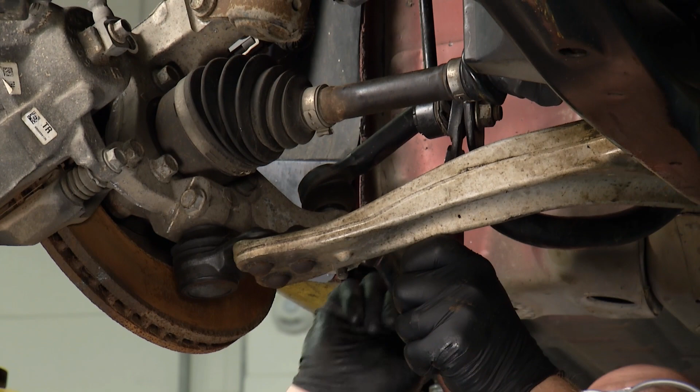Well, if you missed last week, we pulled in an HHR, and Brian, it was pulling a little bit to the right. You think it was dragging a wheel down the street. It was just a little bit more than I thought it was going to be. And that it was. You know, we had to go into the whole suspension system. We tore it all out. I mean, we had a broken spindle we'll look at here on the table in a minute. But, you know, we went into the actual rack and pinion system. That was huge. Walk us through that process.

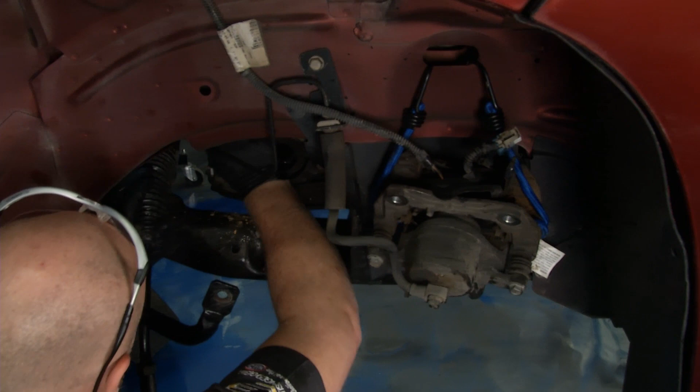Yeah, you know, it really wasn't too bad. There were two big mounting bolts we had to get to. It was easy access with the wheels off. We actually lowered that subframe down just a little bit to give ourselves room. It wasn't bad to get that out or the new one in. Everything is torqued to spec. More inspections as we were in there, making sure there was no welds cracked, no more damage done. Feel really good about the repair.

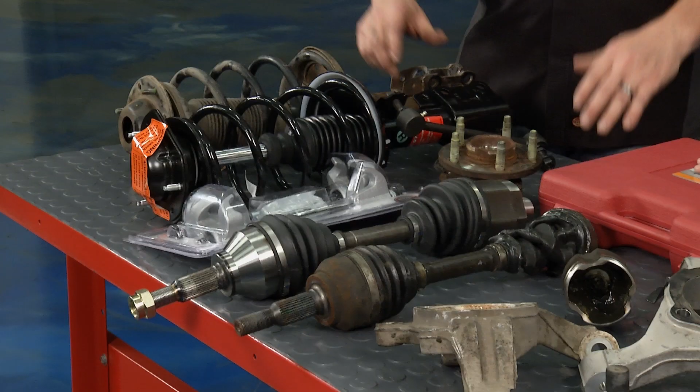We also made some strategic decisions, like we don't want to transfer the old coil spring over and have to go through that, even though we got the right tool for the job. Make it easy. Save yourself some time and risk by getting the whole assembly, which we did. We got the new sway bar links. You can see that's the exact same length. We're all set there. And of course, we got the axle.

Yeah, and time's money. So, you know, by the time you're doing this, you're wasting a lot of time. Time's money. You know, we're actually going through this and talking about the cost analysis. I mean, we're going to do that at the end of the show, but I think we're going to save it. I think we're going to be all right. Absolutely. Well, let me grab the axle and the strut. I'm going to get started.

Before you do that real quick, it's really good to look at both of them. You can actually see the axle right here. Oh, yeah. This is the one that blew apart in the accident when it got hit. Bam, that's it. It pulled right out of the plunge joint right there. Tripod. It's gone. So grab that, get started, and we'll go over a couple of these other components. See you in a few.

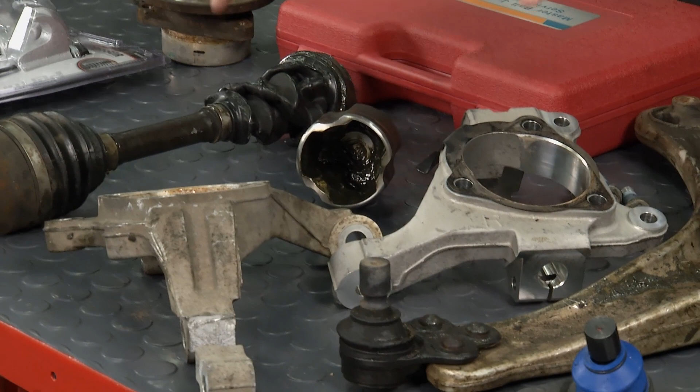All right. Now, when you look at these other components right here, we're going through the spindle assembly. You actually saw the spindle up on the car, and this is pretty good because you can see right here where it's broken and separated right there. That's why we took it off with the whole strut assembly when he did. Now, the new one's located right here. I went ahead and I pulled out the hub, the whole hub. It was in good shape, so there was no need to replace it. There's no problem there. We're going to put that on in a minute.

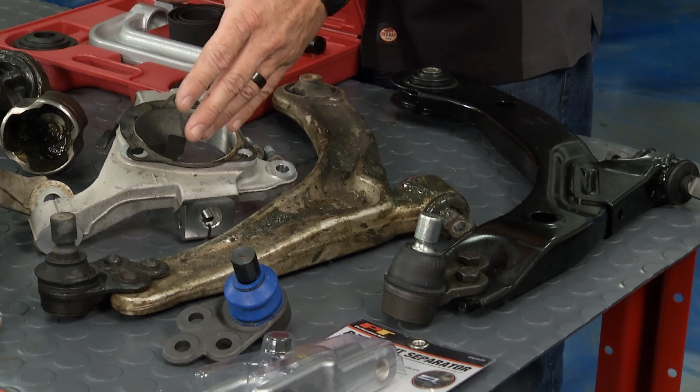But then we go over here to the control arms, and this is interesting because Rock Auto actually sells a control arm master kit right here, which can do actually the bushings on there along with the ball joints themselves, because a lot of control arms, you're going to have to press the ball joint in and out of there. Well, like Brian said earlier, we're taking an opportunity to go ahead and just save a little bit of money here and time. We got the whole unit right there. So the whole unit right there, we're going to put it in. We don't have to mess with the ball joint. Everything's right there in place.

Now, the hub, just as easy as taking it over to the spindle and take it in here, slide it in here, put it in, line it up, bolt it down, torque it to specifications, and then what I'll do is I'll get these parts over, give Brian a hand. He's going to need a hand getting all this front end back together. There's a ton of work going on over there.

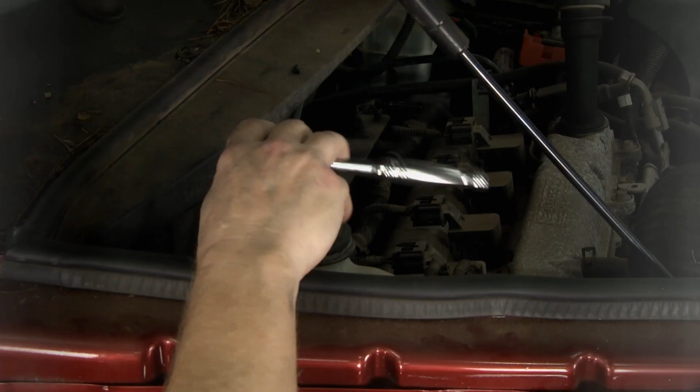You're right, we're getting it done over here, John. All right, that's the third nut on the top of the strut mounting bolt. We don't have them torqued down yet. It's just so that it'll hold that in place and give us some flexibility to work with everything. We got the new CV axle supported.

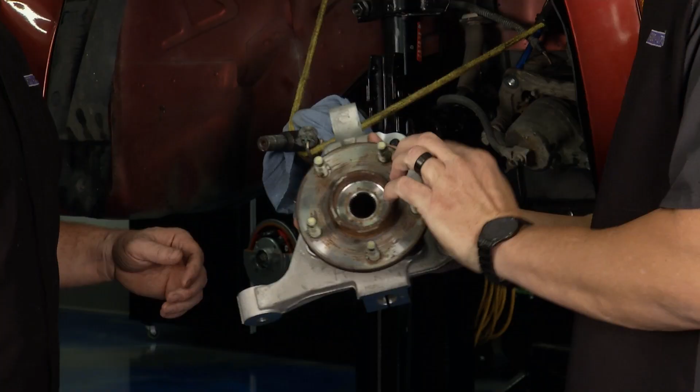Hey, John, how about rolling that spindle over here? Man, I got it ready for you. Perfect. Looks like you're working hard. I actually got the whole spindle assembly, Brian. I got the hub pushed in there real nice, bolted in from the backside. Got your ABS sensor, everything's tucked away.

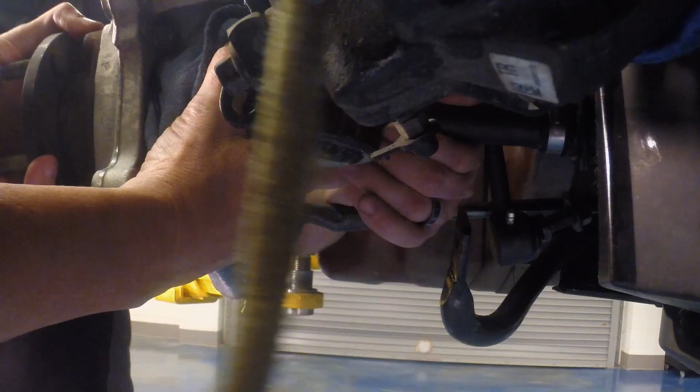I'll tell you what, if you give me a hand, I'll support this CV axle. You want to undo it? Yep. I'll get this bungee out of your way. I'll run it in like this here. Keep the pressure on it, and we'll just put it right up in like that. Great. You want to take it? I'll drop it down a little bit. If you want to take that strut, work it up in there. There we go.

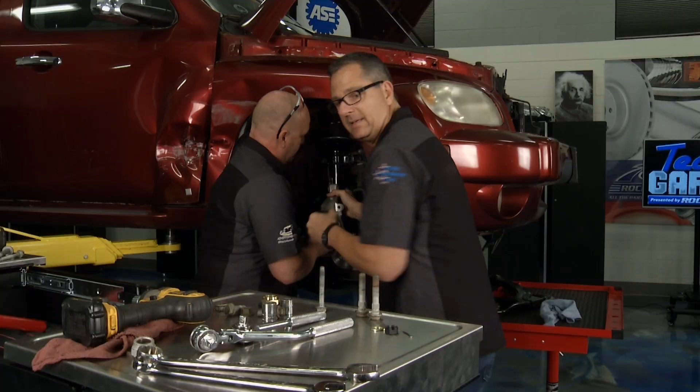Got the strut bolts laying right there for you. Keep the pressure on it, please. Yep, I got it. Strut bolts are right here. If we just get one in. Get one in there and hang it. Yep, that's the way to do it. Golden. And we're not messing with the alignment because we're going to get it close. That's perfect. Okay. Nice. Now let's get that control arm in.

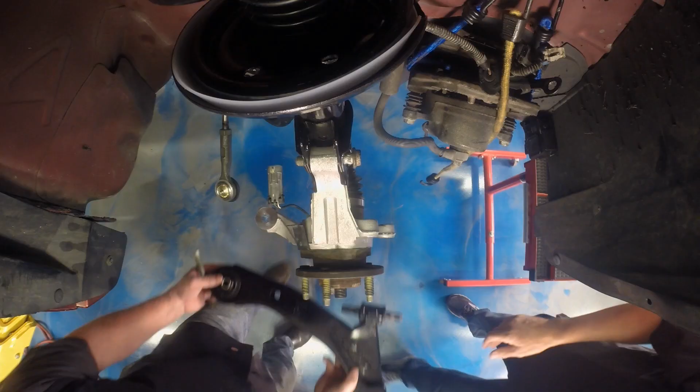There you go. Okay, I've got the big pin here. This was actually not as hard as I thought it was going to be coming out. We're going to go in and up and over. All in one. Well, I'll let you do it up in there. There we go. Come on. Get it up in there. We're working. I know it's not easy. It was tough coming out of there too. Just be patient. You've got the whole frame to go in there. The bushing's got to get sandwiched in there. All kinds of things going on there when you're moving it in.

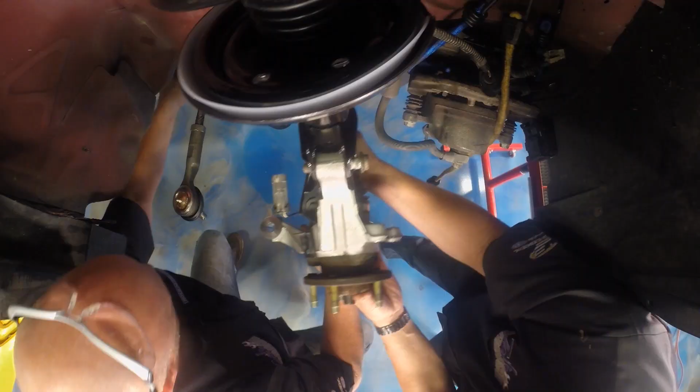There we go. It is beautiful. That's good. All right. I'll hold this side up if you want to hold that side. Okay. Come up a little bit more. Let me get a pin in here. Go ahead, and I'll line up my side. Which way you got to go? Got to come over. And forward. I don't think you're in all the way. Yeah, you got to go. Come on back. Trying. Oh boy. There you go. Perfect. Let me hold this side. Hold that. There you go. Look at that.

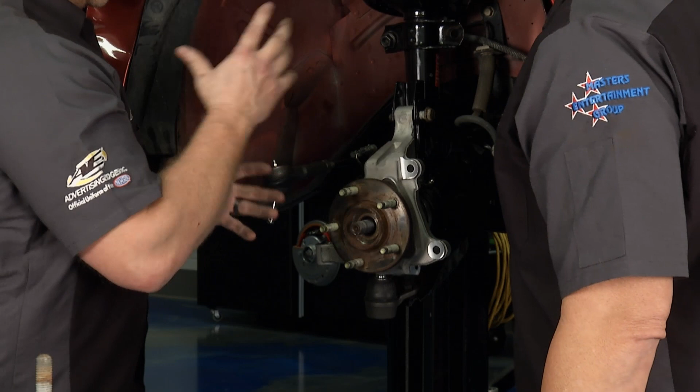Should be supported. Yeah, we'll get the ball joint in. We'll get all this reassembled, get it torqued down. That's really important. We're going to be close, but we're definitely going to need an alignment. We still have to get the steering rack connected, the sway bar link in, and we're going to be good. I'm huffing and puffing. This suspension work can get difficult. Be patient. Get your buddy, manhandle it, get it in there. It's ready to go, man. This HHR is going to drive.

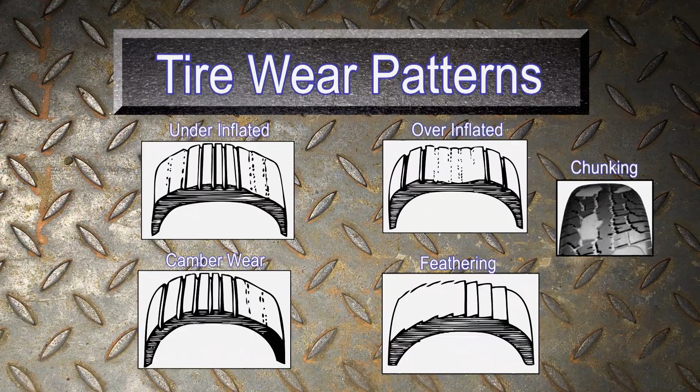Now, you guys have reached out on Facebook and email with questions, and most of them were about tire wear patterns and a lot of alignment angles. So what a perfect time to do it. We got our HHR over there, and Brian and I have been talking about that geometry and getting it right. So let's talk tire wear patterns. Top left-hand corner right here, well, that's pretty simple. It's just an underinflated tire.

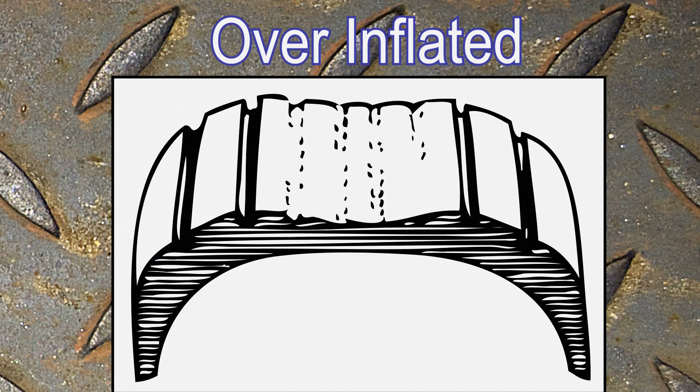It's going to wear on both sides because it's going to bulge down on the road. Now we move over to the right there, dead center of the tire, all the way around. That's overinflation, too much air. Now you have tire pressure monitors, but you still want to go out there and check it so you keep the life of your tire going. Over here on the bottom left-hand corner, this is actually called camber wear. I'll explain camber in a minute, but just keep these in your mind as we switch over and start looking at the angles, because you're going to understand why the tires wear like that.

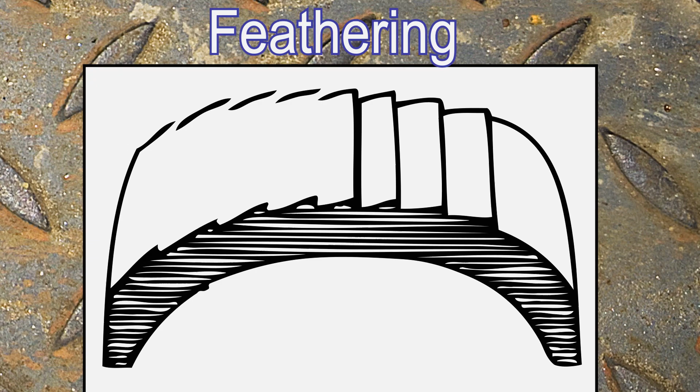This last one right here on the bottom is called feathering. That's a toe in and toe out problem where it feathers the tire clean across, and we'll see that in a minute as well. Now the last one on the far right there, that's called chunking. What happens is you have bad shocks, the tire's coming off the road, bam, bam, bam, you're getting chunking. So it's time to do an alignment.

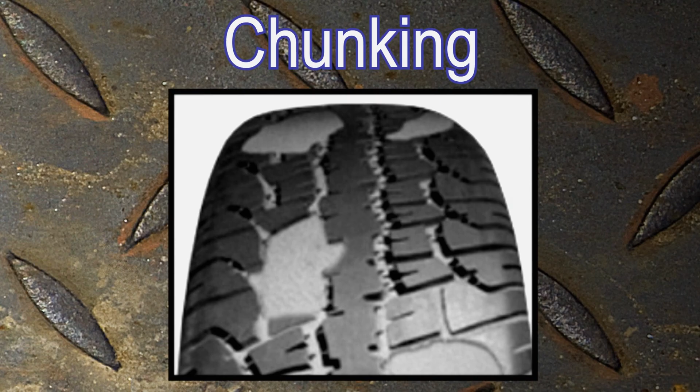We can go to the next screen. Before you get an alignment, the first thing you want to do is get a pre-alignment inspection, because I'll tell you, 9 out of 10 cars are going to fail this pre-alignment inspection. We're talking about everything on the car: tire pressure, your bushings, your steering linkage, your power steering, your wheels, and then some pre-alignment numbers. It has to be in good shape. Everything has to be tight or the alignment's not going to hold.

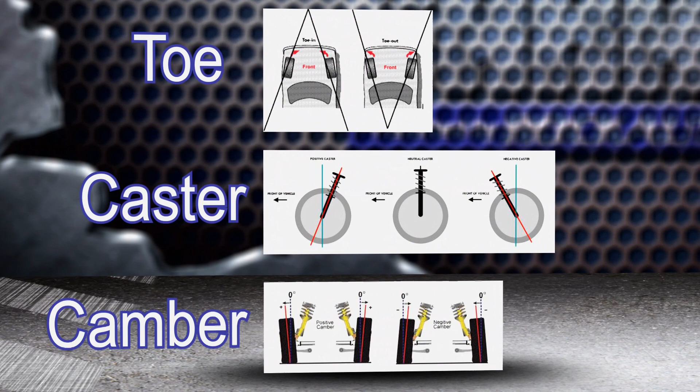And then we'll talk about these angles right here. The first one being toe, caster, and camber. We'll pull those out in a second.

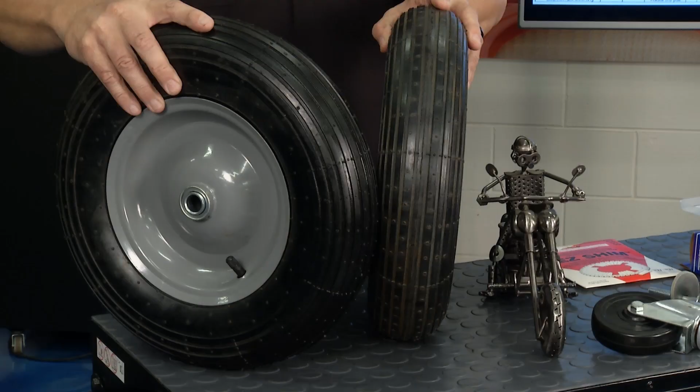Let's talk about that first one up there. That first one up there is toe in and toe out. That's really simple. I can take my wheels right here and I could toe them in. That would be the front wheels going in that angle. If I toed them out, that would be this way.

Now think about that feathering pattern I talked about earlier. It's going to feather from the inside out when they're toed out like that. If they're toed in, they're going to feather from the outside of the tire in. That's the most tire wearing angle, and that one will wreck a tire in no time.

Now the second one we want to look at is caster, and you can see the graphic there. It's the forward and backward tilting of the steering knuckle. So if I had my knuckle go back this way, it would be negative, or forward. A good illustration of that is our chopper here. Now my chopper's going way up there, that's positive caster. You know, when you're riding on your bike and you take your hands off, that's because your wheel's way out there. It gives you good steering and good returnability.

Negative caster, on the other hand, most cars don't have it, but a good illustration of that is the buggy in the store. When it goes around and starts wiggling all over, you'll get some wander. Now that's not a tire wearing angle, but, and this is important, we always pull to the least caster. And that's important because we can actually cheat caster a little bit and go up road crown because it's not a tire wearing angle.

Last one to look at right there is camber. Pull that illustration out and you can actually see the camber goes in, which is negative, and out, which is positive. Now you remember that angle I talked about, that tire wear? Right here. If we go out, that's positive, and I'm over-exaggerating here, but if you look, this will wear around the outside of the tire. On the other hand, if we go in like that, it's going to wear around the inside of the tire.

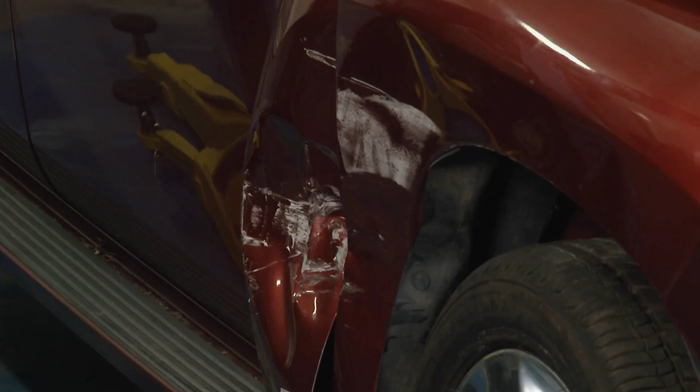Well, with all that suspension work finally done, tell you what, we're getting closer. Don't forget, we still have to go get a full-blown professional alignment. We'll talk more about that in just a minute. You can see that the inner fender has a lot of damage. The actual fender is damaged, not to mention the door.

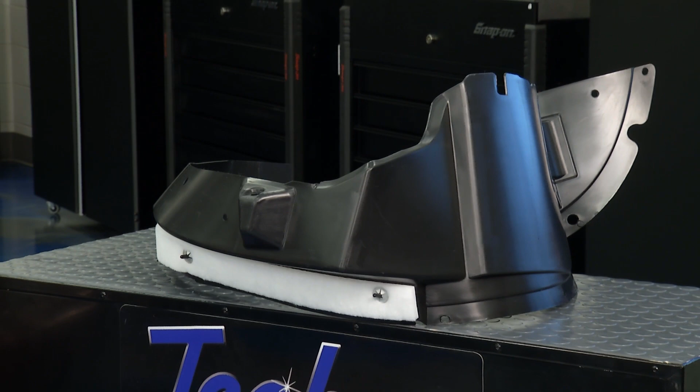Well, now, as promised, we told you we would do a driveway, pretty rough alignment here, but you want to get this thing close, so we're just going to adjust toe.

You don't want to drag those tires down the street to get to the full-blown alignment shop to get that done. Camber, we're pretty close. Don't worry about that. Hey, John, can you give me a hand helping set toe here? Yep. Take a measurement from back first. That's the key. We're going to take a measurement from the back of the tire and the front of the tire.

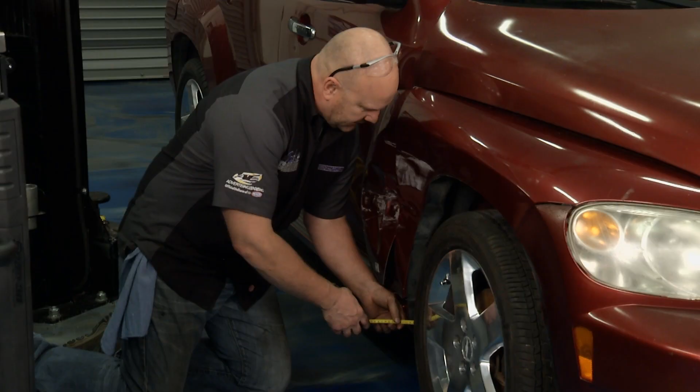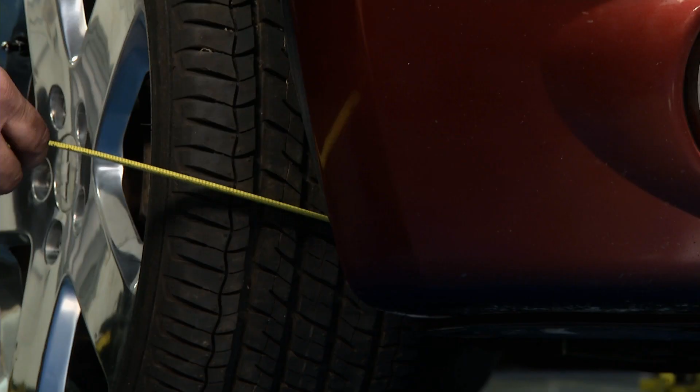We're at 66 1/4 here. 66. I'll send it back to you. Throw it to the front. Let's see what we have. So what we're doing, remember that adjusting nut? There you go. Got it. Same spot in the front. Great. Yep. 68 1/4 here. Wow. So that's a 2-inch delta.

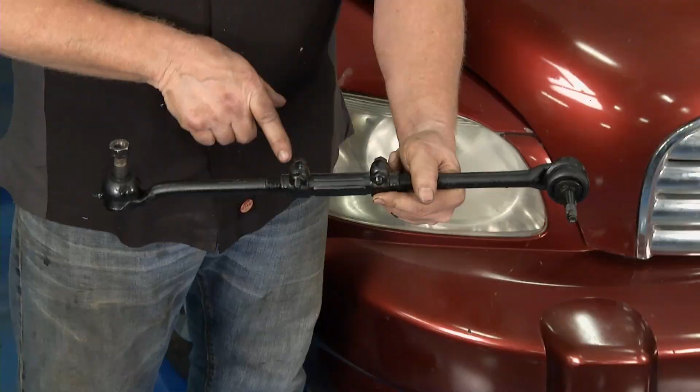So you think about that adjustment nut we had on the tie rod end. If you had that set up, you'd want to back that off. Go to each tie rod end, back them out about 1 inch. That's going to get you in the ballpark. Come back, check the measurement. You should get an average that's darn close. Yeah, no doubt about it. If you had a parallelogram steering system like this, you would take the adjustment sleeve, loosen this, back your tie rod end out 1 inch from there, and you'd be in the ballpark. Yep, and ours just had a locking nut, same difference.

That's pretty awesome. You know, our HHR is awesome. It's actually ready to drive, man. I'm excited. Yeah. I think I may give you this one the keys.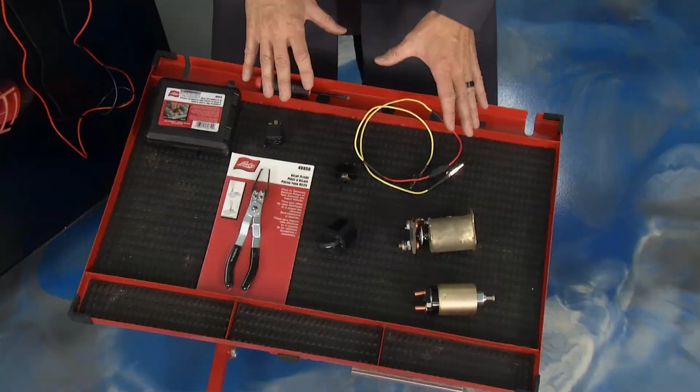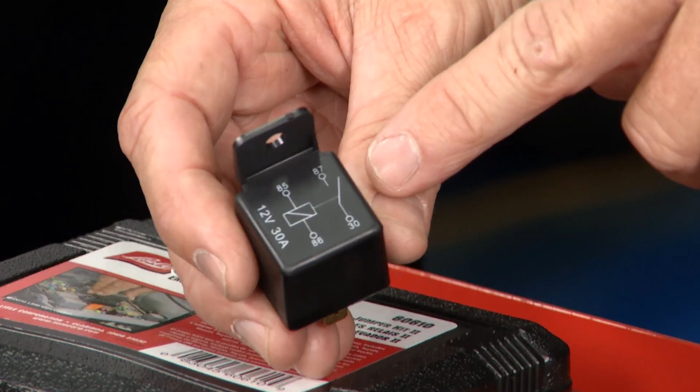Now we're making great progress on our Tech Garage segments, and this one's all about controls, switches, relays, stuff that makes your car work. And I want to take a look at the table here. I want to talk about some switches. Well, it could be as simple as a solenoid switch, like a starter. You can see right here, it just engages. When it engages, it makes a contact and it allows the voltage to go to your starter. You could have a four-wheel drive switch, a toggle switch, but what I want to focus on is relays because they're super important. And I have a relay right here. And the important part of this relay is actually the terminals. You can see the terminals right here, 87, 30, 85, and 86.

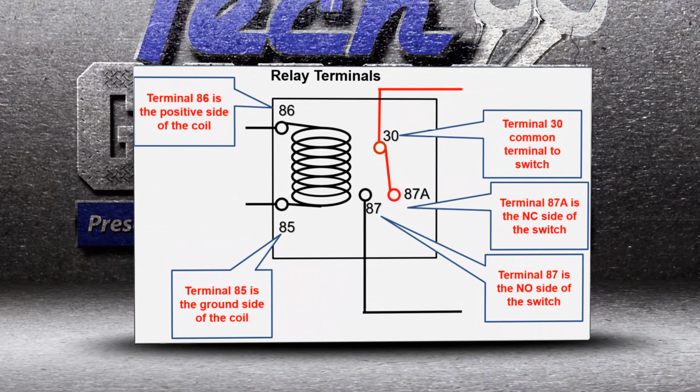Take a look at this graphic because this is important. When we're talking about a relay, we have a control side and we have the actual load side. 86 and 85 is the control side. That's going to be the low amps. 30 over to 87 to 87A, that's my high voltage and my high amp sides. That's what's going to run the component.

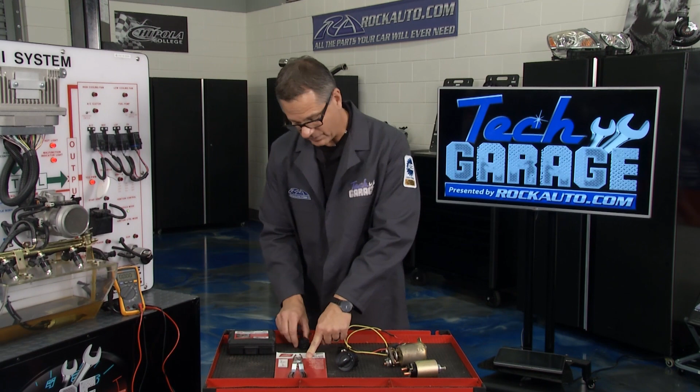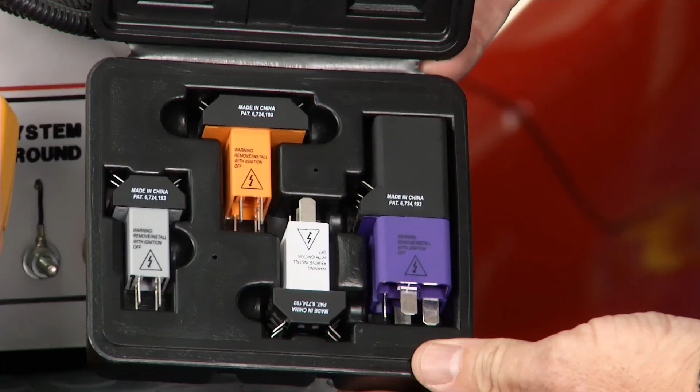So if we're dealing with a relay like this one, we're going to go ahead and use our kit here. I have two things from rockauto.com. First of all, I have a kit right here which actually pulls the relay. If you have a fuse box, that's cool. And then I have the coolest thing ever. This is a relay jump kit, and I can open it and show you what's inside. Inside of here you have all the different relay adapters. Now that's nice because I don't have to go poking or damaging any wires. I can just put this in series.

Now our board right here, we have a couple of relays up here. AC, high pressure, low pressure, and then we have a fuel pump relay. We're going to deal with the fuel pump relay. If I pull that out, I'm going to put our adapter here right in series with it, which is super cool because now I have the ability to make all my measurements and jumps if I want to jump it and see if it's actually working or the circuit's working. Got a voltmeter right here. I'm going to go to ground.

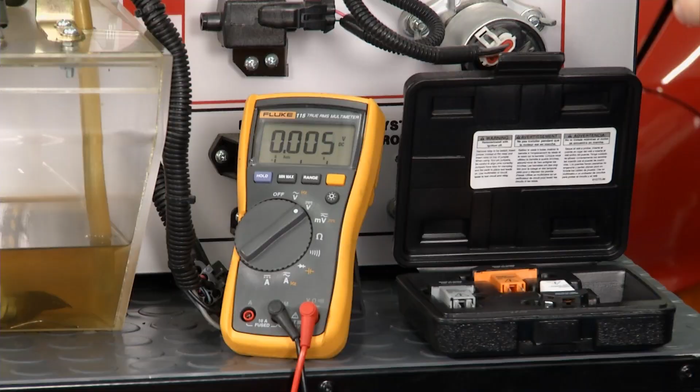When I go to ground down here, I'm going to come up. I'm going to touch terminal. That's supposed to have power right there, which is 13.97. That's good voltage. And then I want to jump that over to that, we said earlier, 30. Now be careful. You may have that at two places. One's low amps, the other one's high amps.

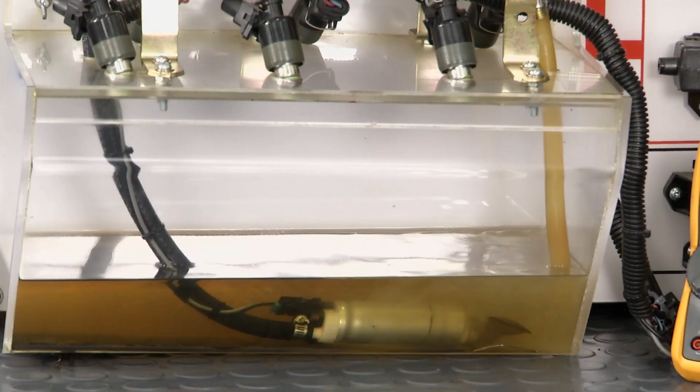So if I just take my fuse jumper wire, very important, and I jump 30 and 87, you can hear the fuel pump run. So what does that tell me or tell you out in the driveway? Well, it tells me your fuel pump's working, tells me your wire harness is working, but it doesn't tell you that the relay's bad. You still want to make sure you have the control side. Maybe the computer's grounding it or a switch is grounding it on the other side of the relay to magnetically pull it in. So it's pretty complex.

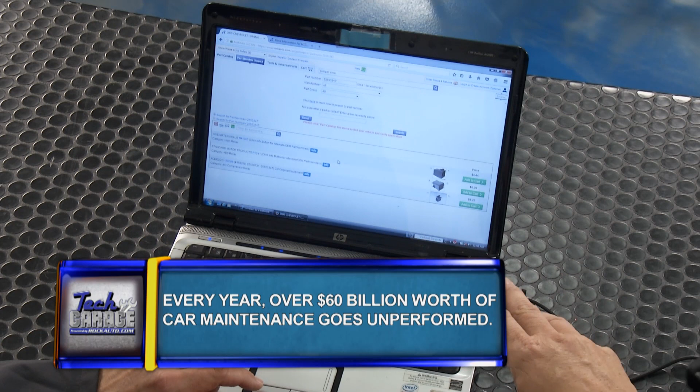Now we saw some interesting tools over there, man. I love it. As an instructor, I'm talking about diagnostic tools. I wouldn't expect that at all. I found them on your website. Why don't you show our viewers where that stuff's at? We have the tools and universal parts tab, and it's arranged like it is for specific cars under electrical and body, and there's a tool section. The tools you were using are under electrical, switch, and relay. We have the relay test jumper, the pliers. There's lots of fun tools you don't even know they exist until you get in there and look around. And you say, wow, I've been struggling with needle nose pliers and my elbow trying to get that to work for all these years. And there's a tool that makes it easy.

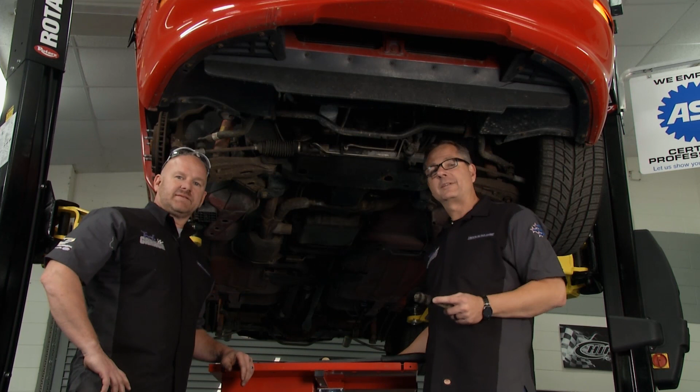Well, Jake, we love it that you learned something on the show. Heck, we love it that you're watching the show.

That's pretty cool. But Jake, don't overlook the obvious. We always go back to the basics here. I mean, suspension, we'll show you some inspections, but don't forget about the sway bar links. I mean, look at this. This one's worn out right here. You can see it pull down. I pulled this one off, not too many miles. Very, very common. Rattle, kind of hard to find, but breaking all the time, Brian.

So is our Firebird. That'll create a rattle all day long. You know what? I checked on the Firebird here. As soon as I put pressure on, this sway bar link fell right out in my hands. It was broken and just rattling around in there. It wasn't making a lot of noise, but there it is. Yep, snapped right off. Right off.

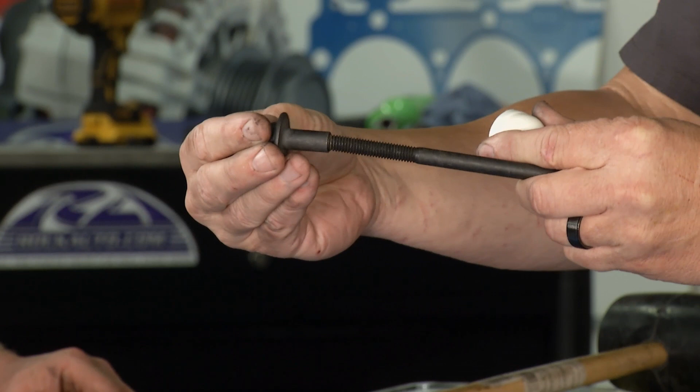Nothing to it. Thankfully, Moog has a problem solver for that. I love this. We got a new kit we can put on both sides. And the cool part about that is you actually have the extra piece right here, so if it's not loaded up or not broken like this, you can go ahead and extend it and everything's going to come through and you can pull it all back together. Makes it so much easier.

Yeah, let's get this all together. It's going to be a piece of cake. All right. Put this back in for you. I'll get this going. Yep. All right. So we put that in there.

Jake, I mean, the suspension, that's awesome, but rattles, a lot of times you can use a rubber mallet. Rubber mallet's great because it makes everything vibrate. So you're just hitting everything, listening, following the vibrations here. Exhaust systems, very common rattles. The exhaust pipes, the dust shields, the heat shields on all of that stuff. You know, sway bar links, suspension, any components. Rubber mallet does a great job.

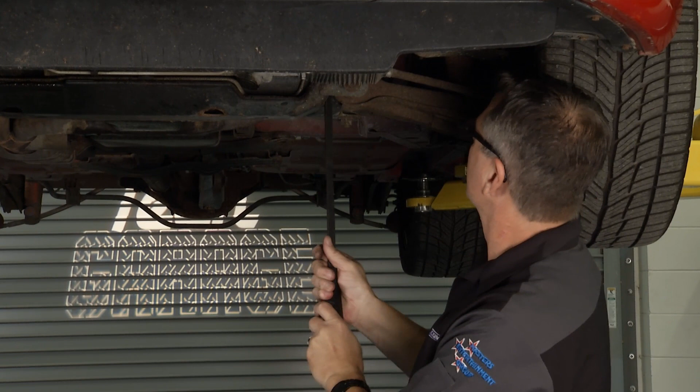Suspension checks, once again, don't be afraid to use a pry bar, man. Grab a pry bar. You got the bushings on the rack and pinion right there, the bushings on this control arm back and forth, ball joints, whatever it may be, even the sway bar links. You can wiggle and pull on that. Man, don't be afraid to tug on the suspension. Absolutely. That was easy. We'll do the other side. We'll get both of those torqued down. I feel really good about that repair.

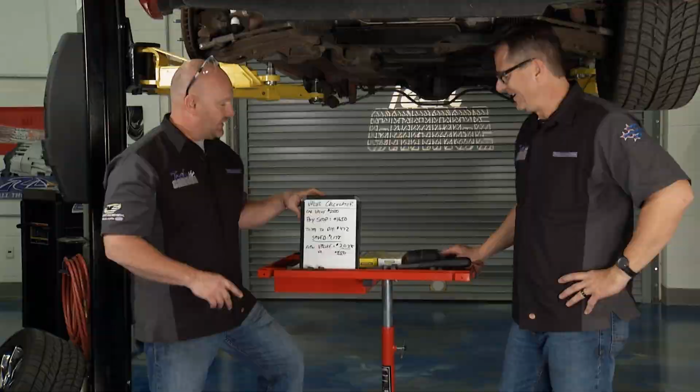Thinking of suspension, tell you what, we learned a lot on that HHR project. We did, you know, Brian, and throughout the whole show, I'm kind of wondering if the car was worth it. You're an expert when it comes to cost mitigation. What'd you find for us? Well, when he said it came in with a slight pull to the right, I started the calculator and was keeping track through the whole thing. This is a little better than my drawing. There you go, yeah, a little bit.

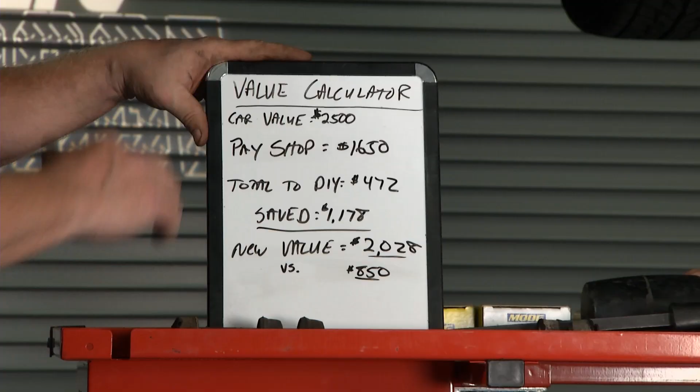You know, that car is worth about $2,500 with some cosmetic damage to the outside, 100,000 miles. That was our starting point. If we would have paid externally to get that done, it would have been at least a $1,650 repair. Instead, with the brilliant partner we've got in rockauto.com, we got everything we needed, spent the time in the shop. We have just under $500 into the project.

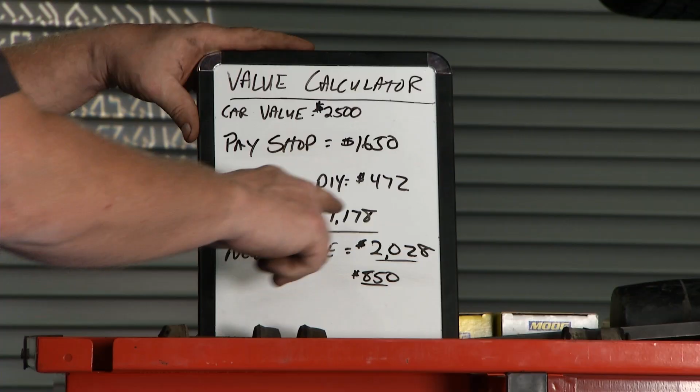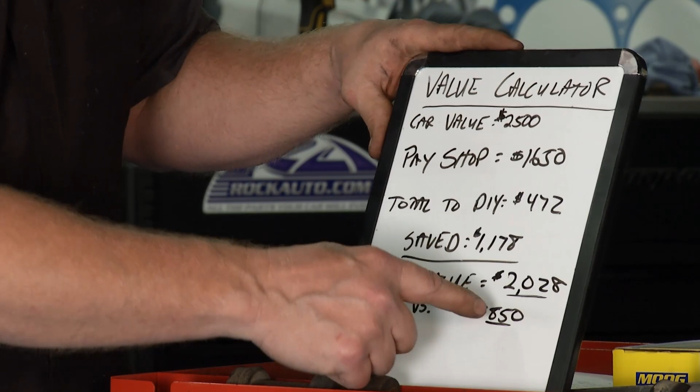We saved almost $1,200. So if you do the back of the napkin math, our vehicle still remains a little over $2,000 in value versus an $850 vehicle if we'd have paid somebody to do that for us. Totally worth it, and a great DIY job in the driveway.

Brian, one thing though I can't live with, rusty rotors and stuff. We just put it together. We want to go ahead and drive it, give it an inspection, come back. I'm going to bring that one back into Tech Garage, man. I'm not feeling comfortable. One step ahead. I've already ordered the calipers, rotors, and new pads for the HHR. We're set. Well, that's a good thing.